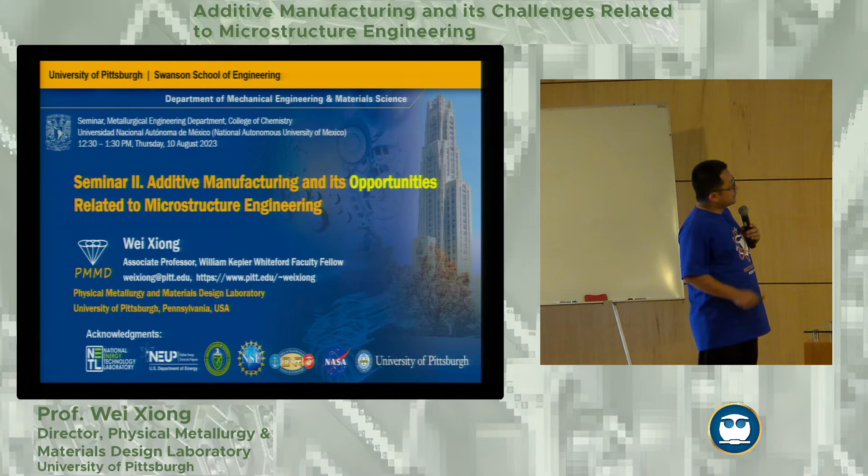So this is a talk about additive manufacturing and the challenges related to microstructure engineering. Of course, it's a little bit disappointing to see all of these challenges, so I think it would be better to revise the title as opportunities. Once we have the challenges, we also raise up with our opportunities.

I come from University of Pittsburgh. Once you're talking about Pittsburgh in the US, you know this is a kind of city of steel. So US Steel and all of the steel factories were producing this, and Carnegie Mellon, and of course they were founders of the steel production in the United States.

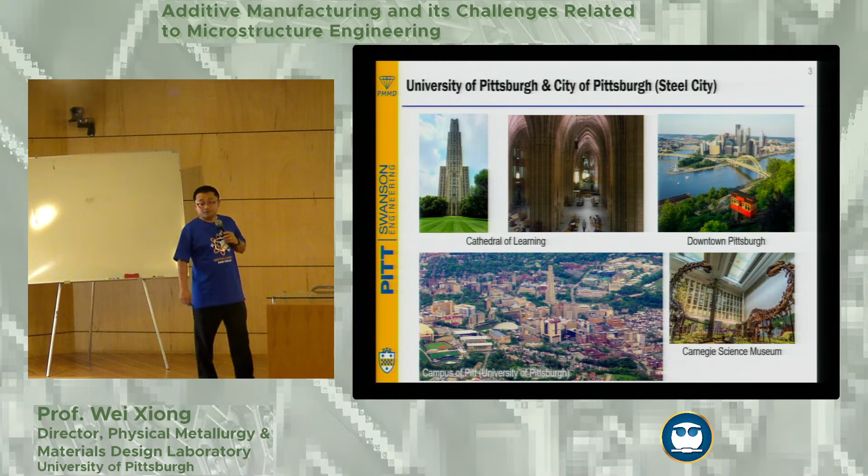If you went to the University of Pittsburgh campus, we have the Cathedral of Learning. This is a landmark building of the University of Pittsburgh as well as the city. Pittsburgh is a very old city, and the university is one of the oldest in the United States.

As I said, I happened to join the university in 2016, and later I just found we have more than 150 years for mechanical and material science. Certainly before that, we were doing metallurgy, and we are very small in material science right now. We only have 9 faculty doing this research, so it's a little bit tiny and focused on alloys and hard materials. We're also expanding a little bit with softer materials.

Talking about the research group, as I said, I joined since 2016, so our focus has 3 parts. The first part is based on simulation modeling, which I already covered yesterday with 2 talks. We do quite a lot with database development and computational materials design. However, we know material science is lacking data.

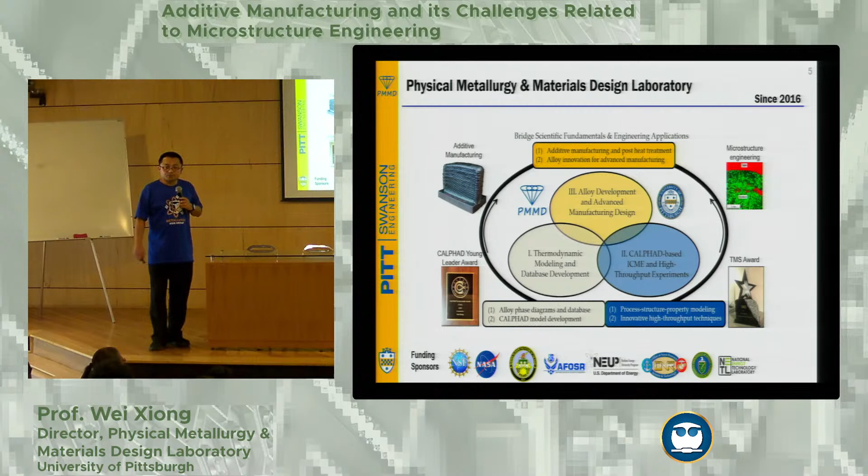Right now, a lot of people are also asking questions about AI and machine learning. So we focus pretty much also on how to extend this ICME method based on some high throughput computation and experiment. Based on that, we do a lot of design, including new materials design and modifying existing materials. We're also interested in advanced manufacturing, which certainly covers one of the topics we're talking about today: additive manufacturing.

If we look at the general design concept of additive manufacturing, we have to talk about the processing, microstructure, property, performance links chain, right? So we're going to list all of these microstructures.

One of the fundamental and basic designs of additive manufacturing is making sure you make a material comparable with the counterpart made by traditional manufacturing technique, or maybe even higher. Once you introduce a microstructure with an as-received condition from additive manufacturing, since this is a different processing, you have to take care of a lot of processing optimization. You cannot use exactly the traditional manufacturing process with heat treatment, for example.

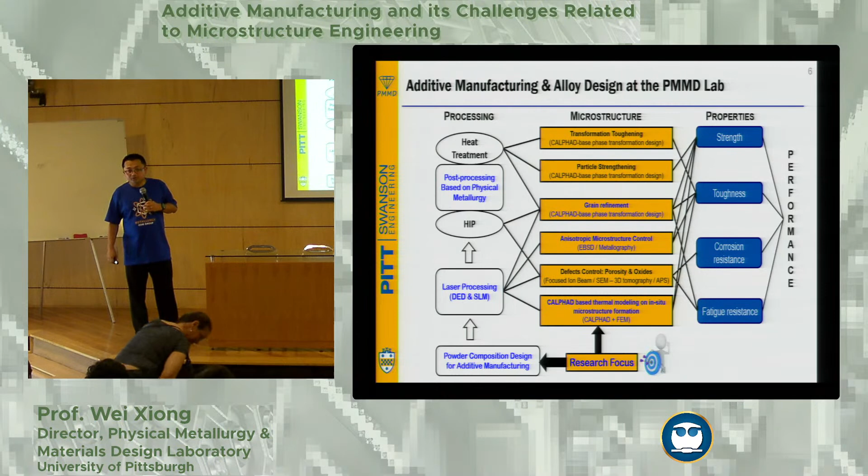Surface finishing and everything has to be changed and accommodated with the as-printed microstructure. So that's a part we focus on very much. And of course, we care about the composition design. If you design one of the alloys, maybe it's not necessarily suitable for additive manufacturing, even though it can be used for casting or some other type of traditional process. So we focus on the composition - that's the most important part from the beginning.

For alloy additive manufacturing, I come from the community doing hard materials, alloys and steels and so on. We have different types of technique. I know that even though your university does not have a 3D printer so far, if you look at the name of your university, UNAM - that's a short name with additive manufacturing in the last two words. So the additive manufacturing techniques - first one is selective laser melting process.

I already mentioned a little bit - this is based on the powder bed, where you have one layer and then you melt the pattern of that layer designed by you with the geometry, and then layer by layer you keep adding on top of that. Therefore you build a 3D structure.

And then you can also have some other type of manufacturing process, like the so-called directed energy deposition process, where you focus on having the powder spray or the wire spray. At the same time, you melt this part at the focal point.

So the advantage of the first one is certainly you will be able to print some fine structures, right? The features of this microstructure are actually much finer than with wire or powder. However, the advantage of these two is you can start to print different alloys at the same time. Typically you can use two wires simultaneously and feed them into one material. You control the feeding rate, and therefore you can start to print so-called functionally gradient alloys or materials.

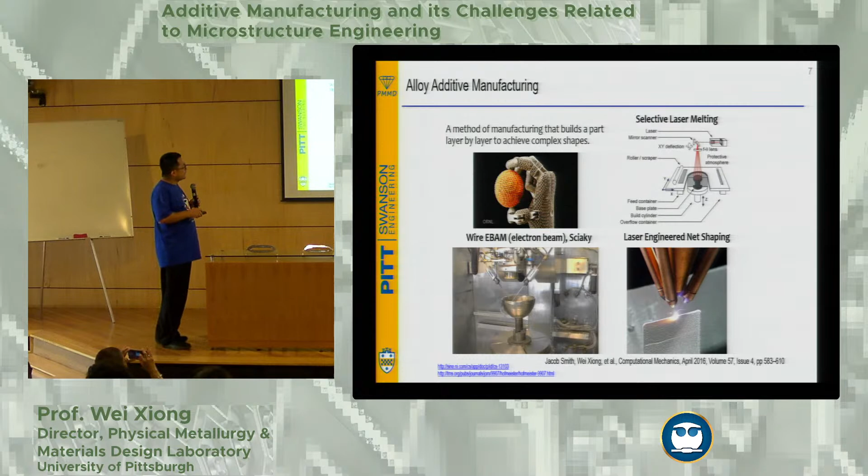So you can print alloy A to alloy B, and this one as well. Another advantage is you can repair something - if you already have an existing blade, for example, and you want to repair some of the parts, that's actually doable.

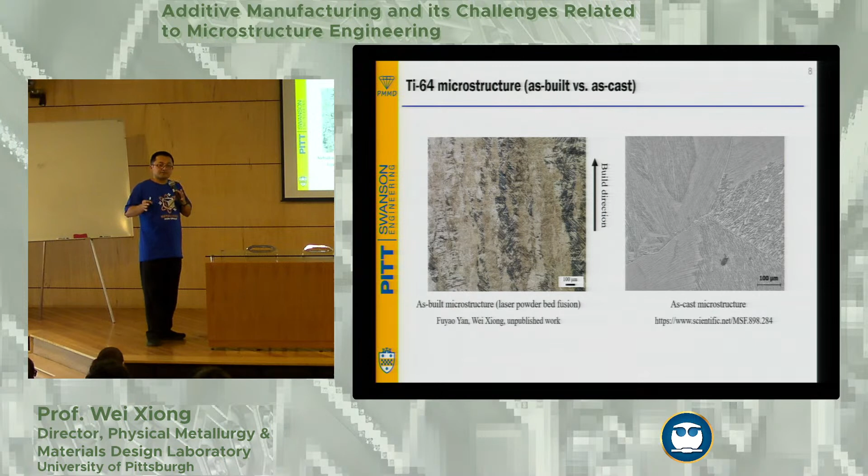Okay, so we're talking about microstructure in this lecture - what is the difference? If you check some of the printed microstructure of Ti-64, that's very commonly used for Ti alloys, the left-hand side is actually the as-printed microstructure from the laser powder bed fusion process, with the building direction shown. You can see all of these columnar structures start to show up, versus the as-cast microstructure from the casting foundry, which does not necessarily have a strong texture like this.

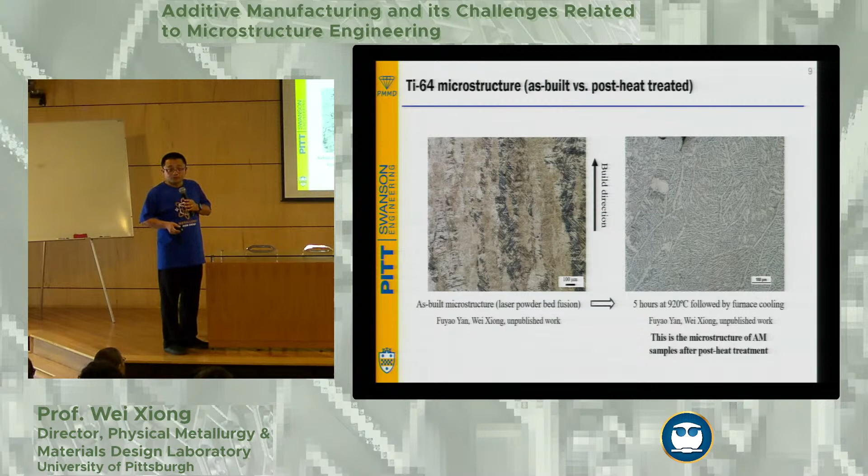And then if you do some further heat treatment, you're going to see that some of the heat treatment can remove some of the textures. So that tells us, first, the as-printed microstructure is different - you have to customize with a suitable heat treatment in order to engineer the microstructure, making sure you get the desirable properties of the material.

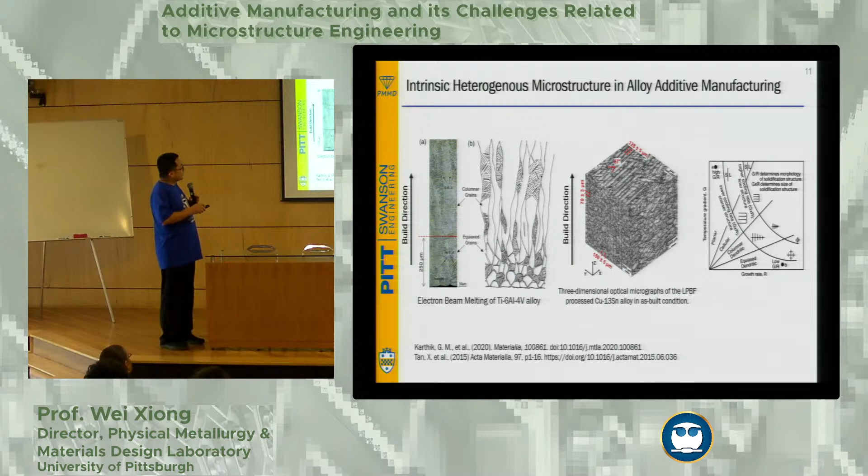However, if you look at another transverse plane, you probably don't see all of these melt pools. This brings us another design area where you can change and modify printing parameters to control the growth of the material from the initial point. You can tailor some structures to be columnar, tailor others to be equiaxed, and then start talking about heterogeneous grain. So that's one of the opportunities we can look at.

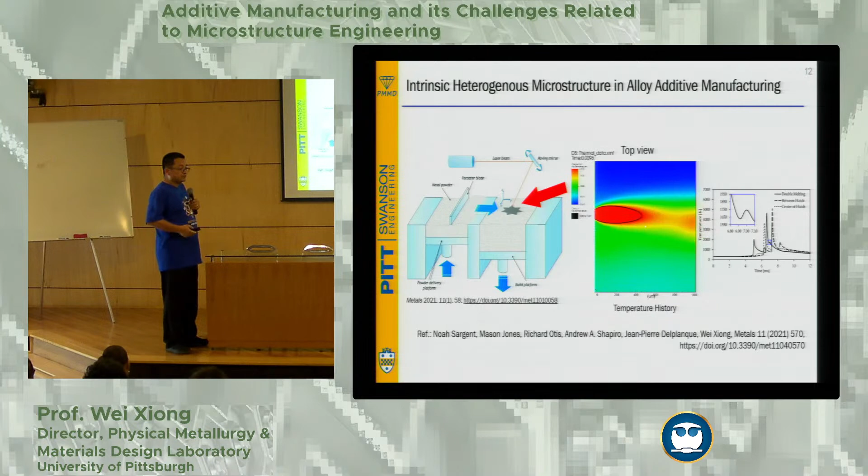This is something we did simulation on to try to understand. For those not familiar with this thermal history, it's very complicated because it's laser melting, depending on the heat source. Some heat sources can introduce heating and cooling rates up to 10 to the 6 K per second, depending on the material and powder used. I don't think anyone so far can precisely measure all of this thermal gradient at the moment. That's also a challenge, because if you cannot measure it, it's very hard to improve and control. So a lot of things are still focused on heuristic design of microstructure.

So what is the consequence if you have such heterogeneous development with texture? If you don't design this well, if you don't introduce good heat treatment to tailor the structure, you can see some structures will introduce very strong anisotropic properties in tensile strength. And of course you can test this further with magnetic properties and so on.

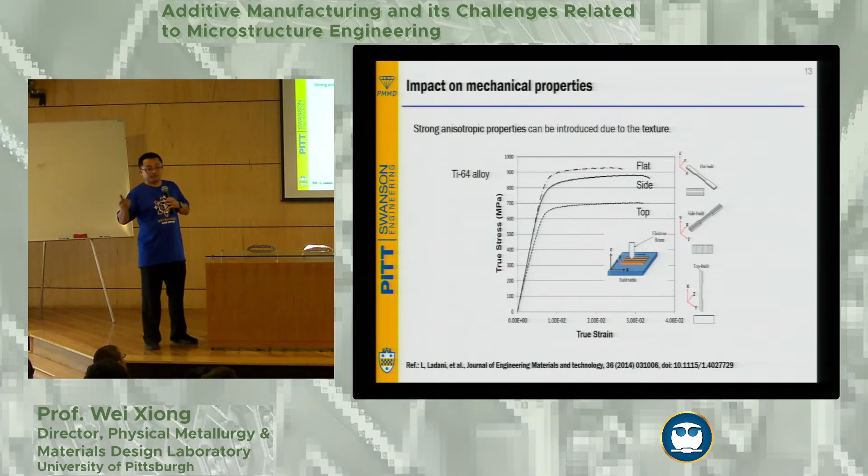So here is a question. You have phase transformations and microstructure evolution - I think these two are almost identical concepts - and they're significantly different from conventional manufacturing processes. So how do you perform microstructure engineering, how do you modify phase behavior and grain structure? That's a kind of challenge.

With this, we want to further understand some basic design points. If you're talking about the three stages of design for additive manufacturing - right now you can buy a 3D printer that's not very expensive if you want to print polymers and plastic. That's just a kind of toy for mock-up. You just design the geometry and print it out. Then if you want a prototype, that's actually a little bit harder.

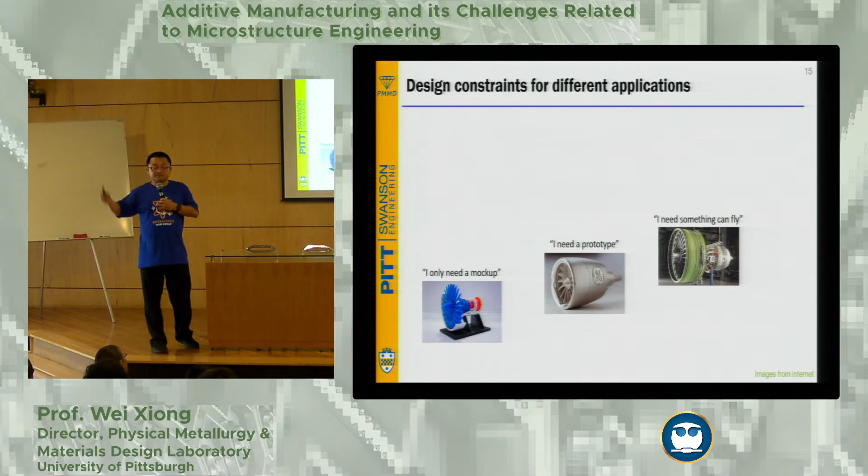This comes from GE, as you can see this landmark, this trademark. However, this doesn't necessarily have to be the same size as what you'd actually use for flight. This is still much more difficult than the mock-up stage because you need to consider integration of different components. And if you really need something to fly, that's way more difficult because you have to consider all the uncertainties, qualifications, and so on. That's the kind of level we are discussing - we try to make sure printed structures are actually useful.

So we look at cost-effective design, and we also need to think about how things relate to the hard material, alloys, and so on. There are also 3 steps here.

First, if cost is not a big issue - you have a lot of money, like Elon Musk - he can directly use, he just wants to see the product and ship things to space. Then you can just choose some fantastic alloys and do the printing. At the moment, of course, he will also claim he wants to reduce cost because it's very important for SpaceX. Then he will say, oh, I want a component with outstanding properties and low cost.

These approaches are actually allowing you to do some post-heat treatment. However, less is more. The best way to design a 3D printed material is to have good outstanding performance from the as-printed alloy, so you don't need to design any post-heat treatment. You just use the as-received material directly. That's the best, because you save a lot of cost and money.

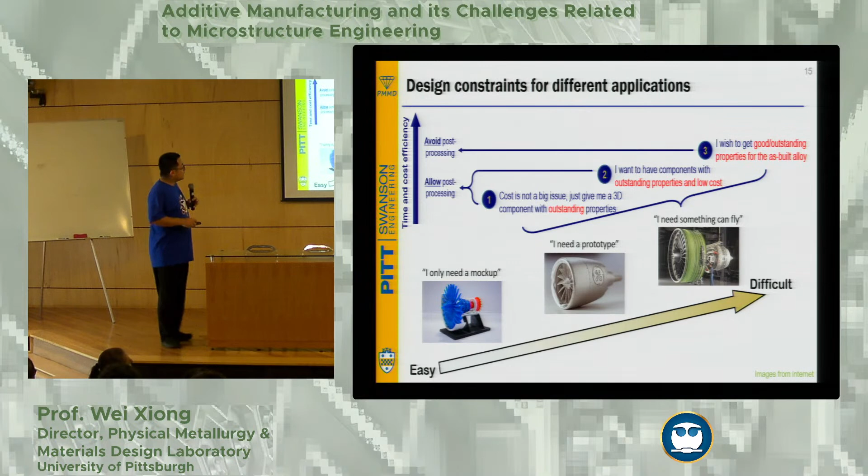So that has to be done with a good understanding of the relationships introduced by the laser printing process, for example. So yesterday I brought up this picture, and some of you already know - I compare this with human development, where the feedstock material is comparable to our human beings.

So as I said, if you want to have a new baby, you don't want to drink, you don't want to smoke, right? That's a high quality. And then you want to send the baby to a good school, making sure they can be educated well.

That's the part with additive manufacturing. You want to really control good laser melting parameters to ensure good melting design for this process. And not everything can be designed well with 3D printing itself, so you have to introduce post-processing. That's the part where, similarly, you want to go to the universities.

So talking about melting design, we have some case studies. I bring some studies from the literature and some from our own work and publications. There are a lot of innovations you can make, but this is still at a fundamental level. We're not talking about using this manufacturing process to make a car or a flight, because that requires a lot of qualifications and so on.

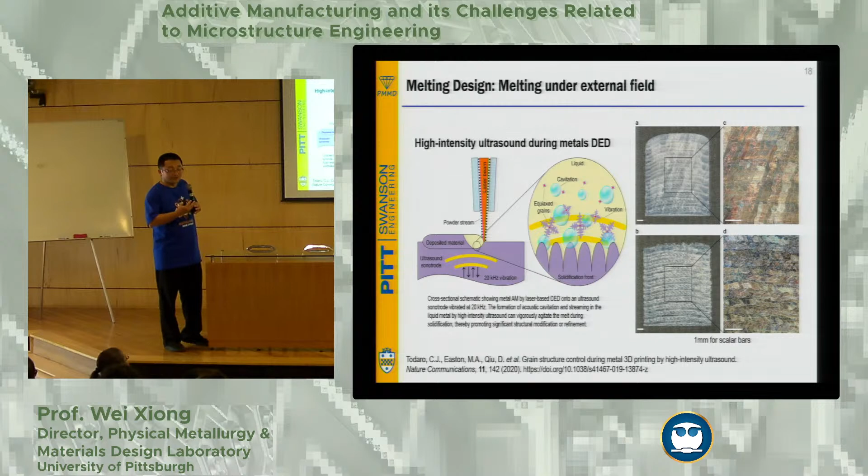That's also applicable. And if you understand the processing quite well, you also have a lot of opportunities to change things directly during the melting process. That's one of the studies regarding the titanium alloy. If you look in detail, this is the sketch, but it's more or less similar to the microstructure you see with regular printing.

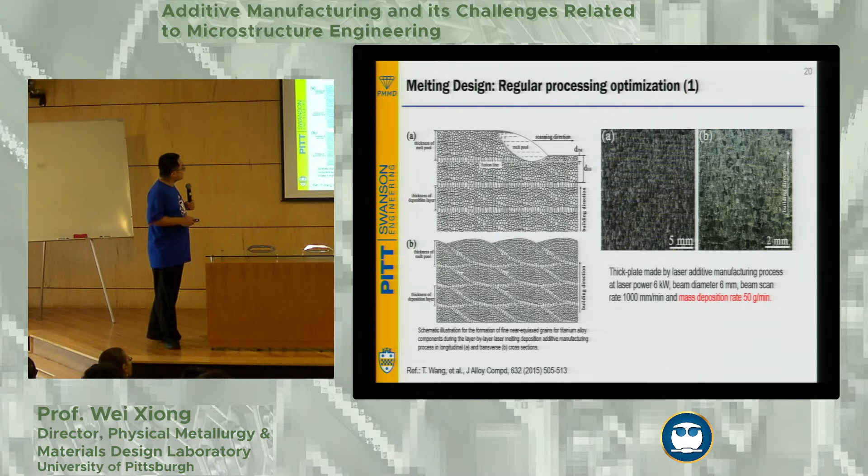You can change the thickness of the deposition layer in order to change the grain structure, and through this introduce a layer-by-layer structure. This is exactly the concept of heterogeneous grain structure in the material. You can control the deposition rate, because if the deposition rate is high, it doesn't allow enough time for growth to happen, so it's limited to nucleation with a very short growth time. Therefore you can refine the structure. That's the basic concept.

Of course it's very hard to quantitatively do theoretical design for this, but with 3D printing you can do a lot of high throughput work. This high throughput approach lets you change the parameters easily within one printing, using multiple processing parameters to see the response of the microstructure. That made it a lot easier to control the relation between parameters and microstructure generation.

This is our work with Haynes 282, a very popular high temperature alloy used in different applications. This technique is nothing different from traditional welding. If you have a wire, you make an arc, and if you weld only one track, that's welding. If you're patient and weld one layer, two layers, three layers, several layers, you start to do 3D printing. Same technique.

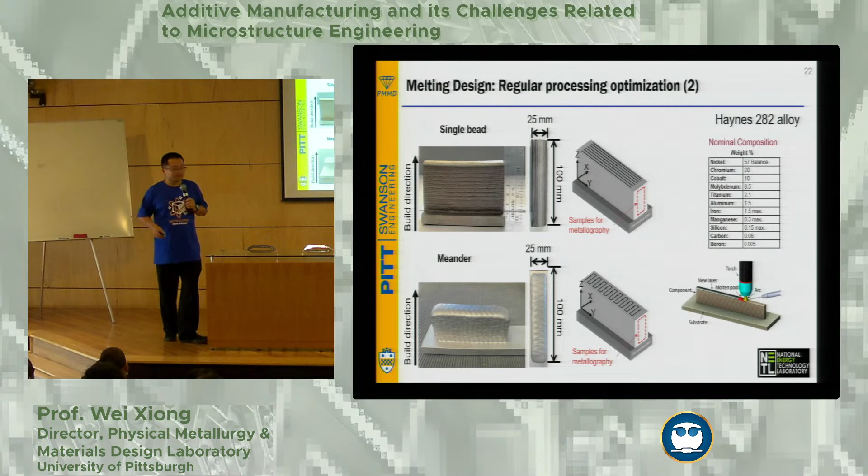So what is the sequence? If you check the cross section, you can see the single bead introduces a lot of fusion lines. They are not necessarily parallel with each other, because the single bead has less heat dissipation. If you melt this direction, you can wait long enough to cool it down, so you see a lot of melt pool shapes here.

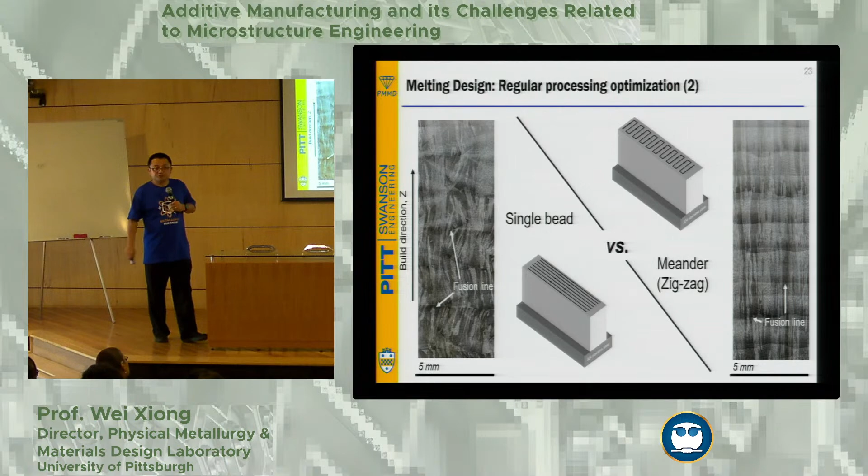But with the zigzag shape, it's actually very high intensity, with such a cross section with the heat. Therefore, you can see some of the fusion lines are actually horizontal. So with this, you can see some as-received microstructure differences.

So let's look at some post-processing with heat treatment. I'm just taking some examples, still connecting with Haynes alloy with some slides. Before that, I'd like to say, if you look at this Haynes 282 that I showed you, these grains are very large. Typically the melt pool size is almost 2 millimeters or even larger, because it's a traditional arc melting process. So you would like to think about how to refine the grains.

With this concept, we started with Inconel 718. This is the one from the previous presentation talking about recrystallization—an old metallurgical concept, but still very useful with new techniques. Inconel 718 is also a high temperature alloy, so we compared the cast and LPBF, the laser powder bed fusion process.

As you can see, this is the as-received microstructure with the cast—it's almost a perfect equiaxed structure. With the LPBF method, you can see a columnar structure very much. However, if you design well the homogenization, an essential part of the post-heat treatment, we put 1180 degrees C for 20 minutes, 1 hour, and 12 hours, and you can see the microstructure change.

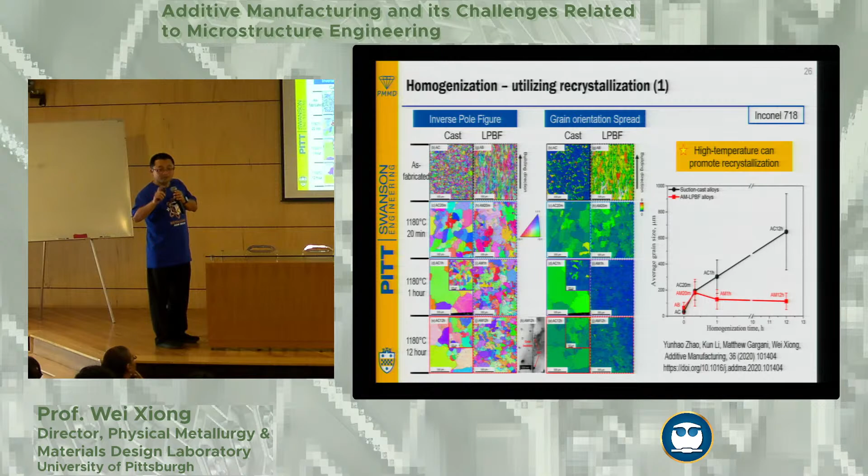If you dissipate the stress at high temperature, this stress helps refine the grains during the recrystallization process. If you analyze the grains, the additive manufacturing grains actually become even smaller than the original ones. That's a good indication—it means additive manufacturing doesn't always bring trouble if you can really define the post-heat treatment well. That's encouraging.

All right, so this is not the whole story. We have a 'but.' If you look at the 'but,' that's something bad. Why do we say 'but'? Because, as I said, every step is linked with each other.

Inconel 718 is a precipitation strengthening material, with gamma prime and gamma double prime. So if people design this, you also need to do a very well-designed precipitation strengthening process. If we blind ourselves and say, hey, I get a better grain, so the material would be better—that's actually not true.

If you do the first homogenization process, you receive fine grains. However, the consequent lower temperature aging process will introduce different precipitation behavior. That's because the homogeneity of niobium, the most important element in this alloy contributing to the formation of gamma prime and gamma double prime, is actually different now.

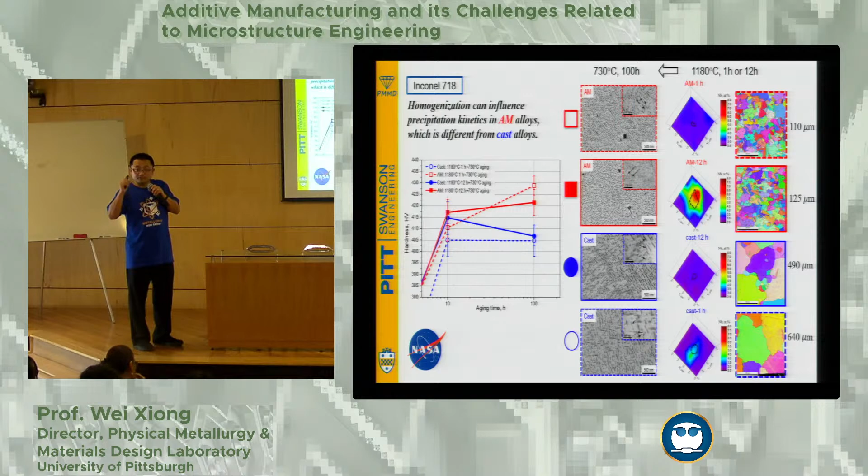So you can no longer use the traditional cast alloy heat treatment. You have to further change the heat treatment schedule in order to ensure you keep the same strength, or even higher strength, than the traditional material. That's the piece of information we have to keep in mind.

So with this study, we learn a little bit about the grain structure, which is very important. And then we further want to look at some even more challenging problems with Haynes 282. As I said, this is a laser powder bed fusion process, and the structure is actually much finer.

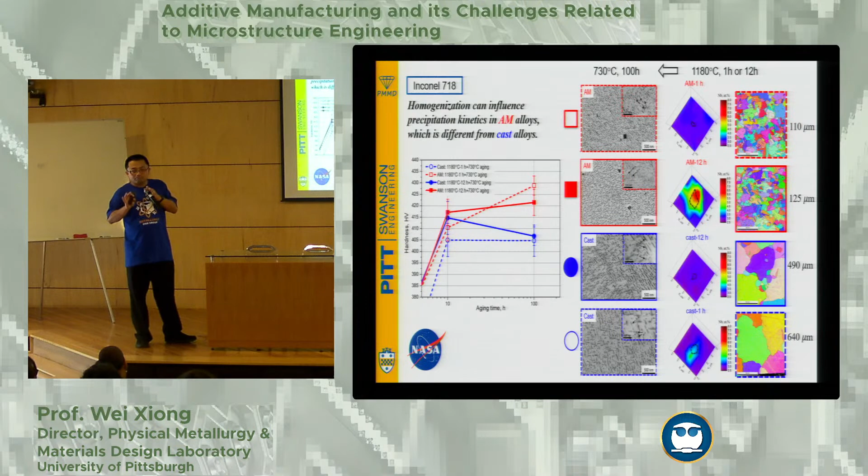If you do the wire feed process with Haynes 282, that's the wire feeding with welding, these columnar structures and so on are actually more than 1 millimeter. You don't want this at all.

So what we did is check in with different temperatures. We also want to promote some recrystallization process. What we did is different temperatures, different times.

And behind this, we were checking some segregations and using Thermo-Calc and CALPHAD to predict the reasonable times for the homogenization and guide us in doing experiments. That's the reason behind this choice of temperature. I won't discuss this further here.

So after doing heat treatment, as you can see, some fine structures actually happen, but not so pronounced. That's still something we think is good. So what we do is check in with the SEM, and as you can see, this confirms it.

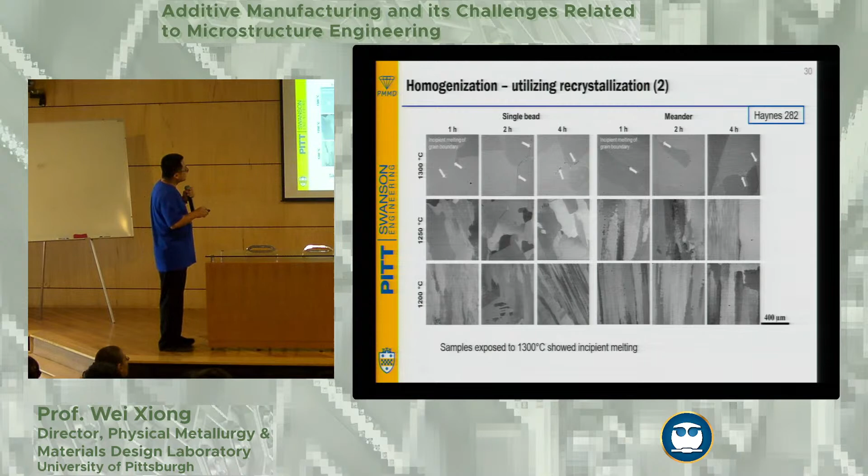Another indication is when you look at these two different printing strategies: single bead and meander. Because the initially introduced microstructure is also different, even if you can promote the recrystallization process, you're not necessarily guaranteed that this recrystallization will help all the grain refinement introduced in this Haynes 282.

So it only happened with single bead, more pronounced. But that's not the full story - we have another issue here.

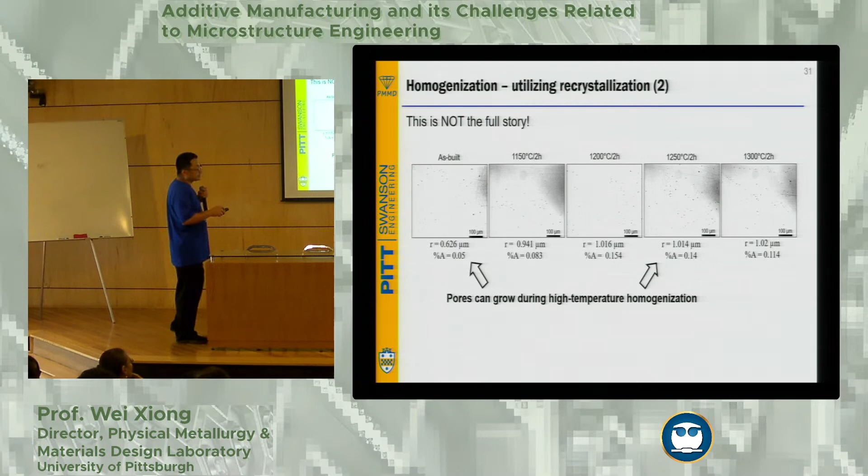So we actually find that if you do higher temperature with recrystallization, then all of these pores become a problem. If you have the additive manufacturing introduced microstructure here, you can see different pores. But then if you further do the homogenization, these pores will start to grow.

That means what? You have to use another technique to solve the problem. So you get a refined structure, but you introduce more pores, because the pores are actually growing. So what we need to do is actually introduce a hipping process. If you don't have hot isostatic pressing, then the pores will become another issue preventing the retention of high strength for this alloy.

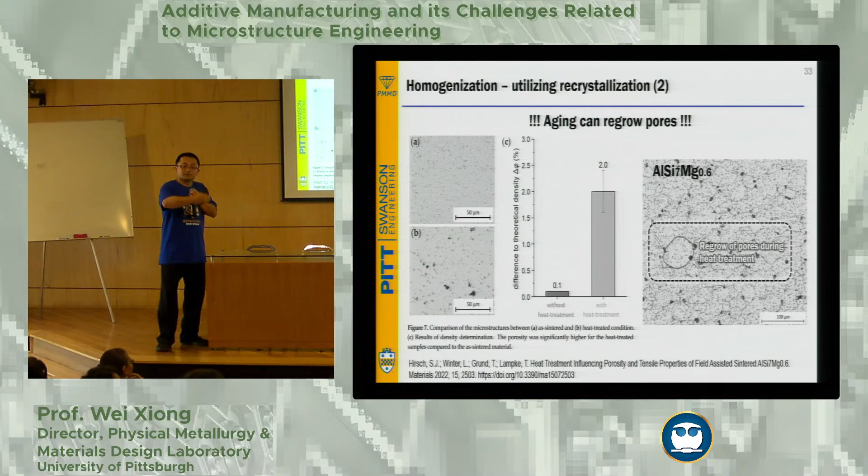So aging in particular can regrow the pores. This is another example you can find with aluminum alloys. So there's a lot of trade-off in how you design additive manufacturing with heat treatment and processing, and of course you have a lot of degrees of freedom to introduce a good design for the material as well.

So I don't want to say all the things are bad and challenging about additive manufacturing, but I would like to still encourage everyone to use traditional or classical metallurgical knowledge to design additive manufacturing. This is one of the studies we checked before with one of the steels. If you look at some of the martensitic cyclic transformation studies in traditional publications, people considered grain refinement with cyclic austenitization process. This process is very simple.

If you do a kind of casting and so on, you receive the microstructure. What you can do is heat it up and let the microstructure homogenize, forming the austenite, and then you quench it and start forming martensite below the MS temperature. Therefore, you can do a cyclic cooling and heating process. Once you form the new martensite, you have more nucleation sites, more dislocation density, and therefore much finer grain size. That's a well-known technique with a cyclic austenization process.

So what we did with this new maraging steel that we designed, trying to commercialize it, is the composition, which is still quite different from traditional maraging steel, 17-4 PH. So this is information where you'll be able to see some of the martensitic cyclic structure.

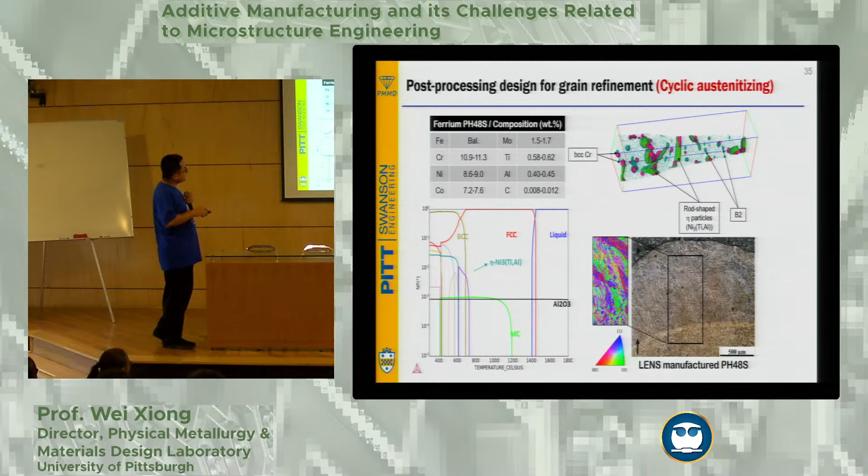And then we did additive manufacturing printing process. The post-heat treatment we do is homogenization: water quench it, heat it up, quench it, heat it up. What's the consequence? This is the average prior austenite grain size. With one cycle you get a reduction, two cycles reduction, three cycles, because you have a limitation with the new nucleation sites introduced by martensitic cyclic transformation, you reach a plateau. And the hardness is also reaching almost the same at these cycles. That means within 3 cycles you can actually refine the grains.

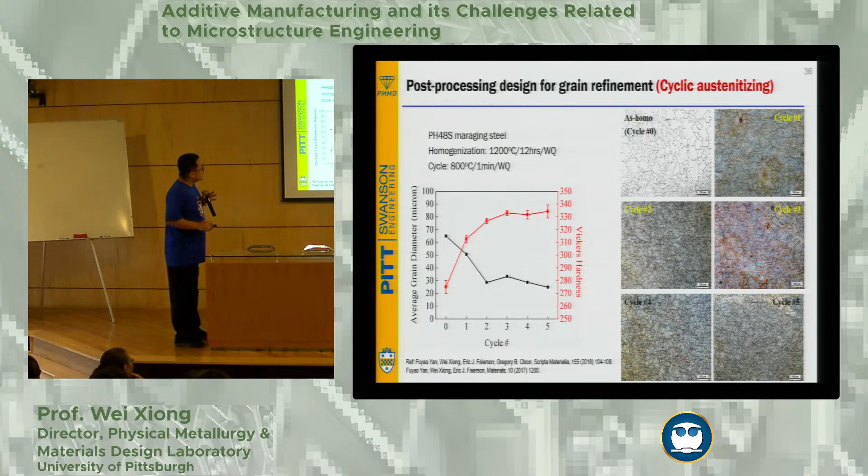It's a very, very encouraging story, talking about traditional metallurgical concepts that still apply.

And of course, another thing we're talking about with grain size refinement is using Zener pinning grain boundary particles for grain refinement. And Zener also stayed in Pittsburgh while developing his metallurgical theory.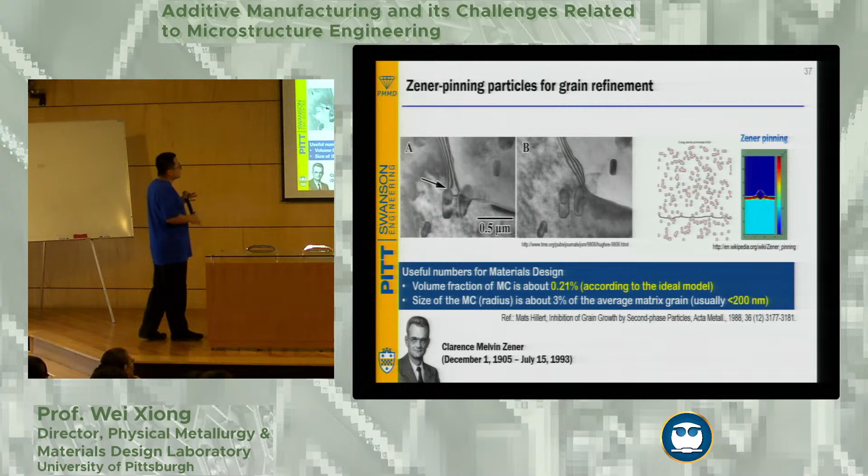So for the Zener-pinning particle, this is from Wikipedia. I don't think it's a real picture, but it gives you the concept: if some particles, for example in the steel, you have MC carbide particles, if small enough, close to less than 200 nanometers, you can have a kind of pinning once the boundary crosses this Zener-pinning particle. This can actually delay grain growth and make sure you get a fine grain. This is the same or similar concept as in casting, where you introduce inoculation with particles.

So this is kind of a discovery type of work. We started with 3D printing of 316L. This is again a laser powder bed fusion process. We asked people to hand down some powders, so we characterized the composition, and this is the composition of the material. As you can see, you have this oxygen content.

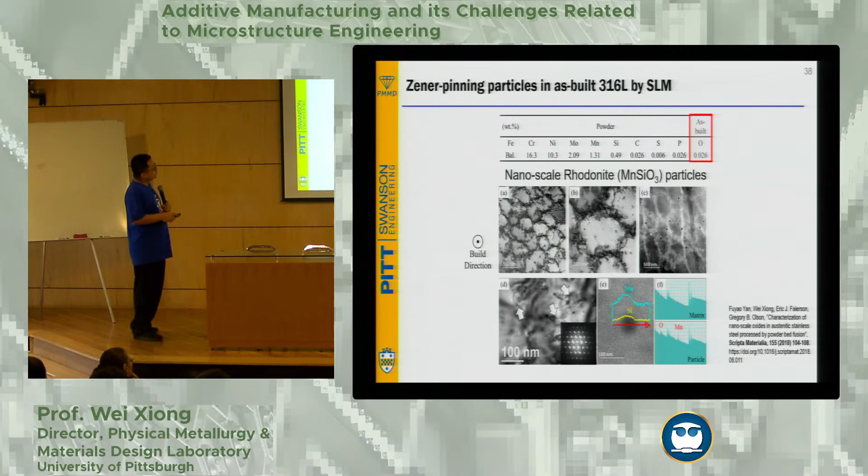So we started with this homogenization again. We finished printing, then did high temperature processing with homogenization at 1200 degrees C, austenizing it. Then this continued with different examples: we did the printed one, with half an hour, 1 hour, and 2 hours.

Visualizing the IPF picture, you can already see some of the grain effects, it's actually a little bit finer. And quantifying it, the grain size is also reduced. Here, this is the hardness - I have the wrong index of the color, sorry about that.

So what is the reason behind this? We checked the microstructure with EBSD, and also checked with TEM. Once we went to the TEM study, we checked all of these possible precipitations. This is the printed one initially, and we find a lot of small dots, also spherical shaped, entangled with the dislocations and cellular boundaries.

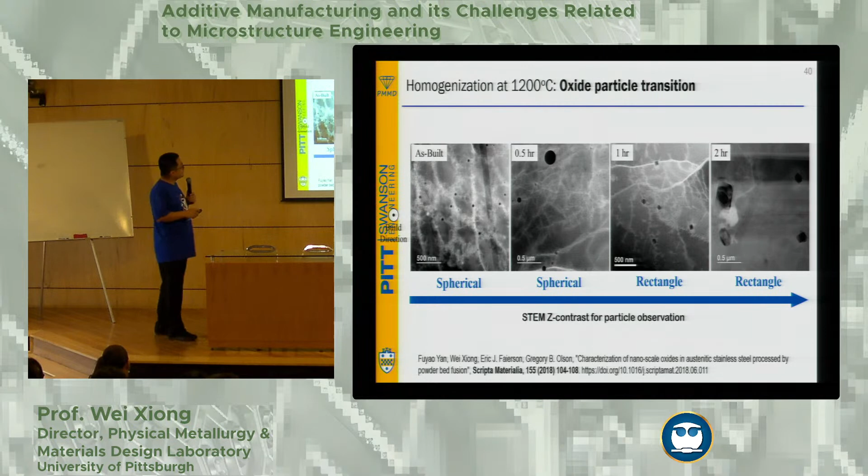After 30 minutes we find some growth, and at 1 hour and 2 hours. If you look at the shape, it's also changing, starting from between half an hour and 1 hour, it becomes spherical to rectangular shape.

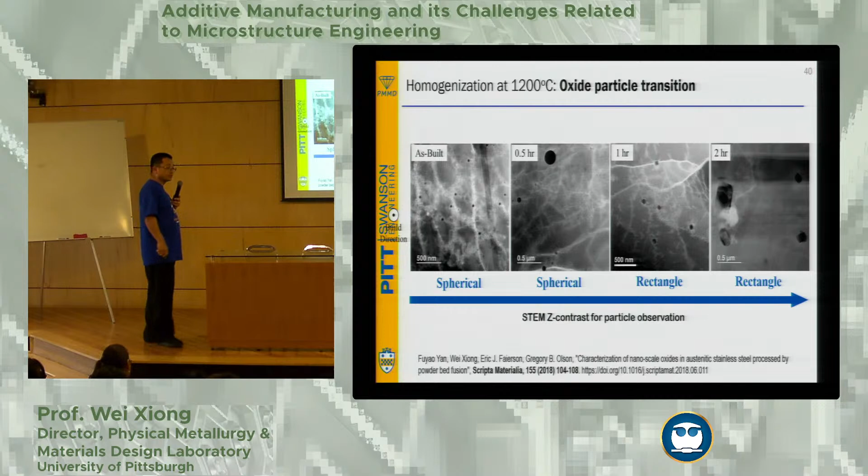What's the reason? We use Calphad, we use Thermo-Calc to calculate and understand better. This is exactly what I was talking about yesterday, the iron-chromium system, suspended sigma phase calculation, or including sigma phase calculation. We quantified, did some EDS in the STEM, and identified these particles are actually spinel, with manganese silicon. And then we calculate.

If you do the calculation, you see, I put the composition, using the iron database, including the oxygen content, I can see the spinel phase is actually showing up. This is exactly the ideal size and fraction of the Zener-pinning particle.

In addition, the Zener particle fraction has to be low. If you have too much of the Zener-pinning particle, that will become an inclusion later. So you really want to get this very low fraction of the spinel. But then we still did not explain the reason for the spherical shape.

So what should we do? We checked another one, rhodonite. It's the same type of chemistry, but the shape is just different. We further checked with some information and found rhodonite is actually a metastable precipitation oxide, so we were trying to understand.

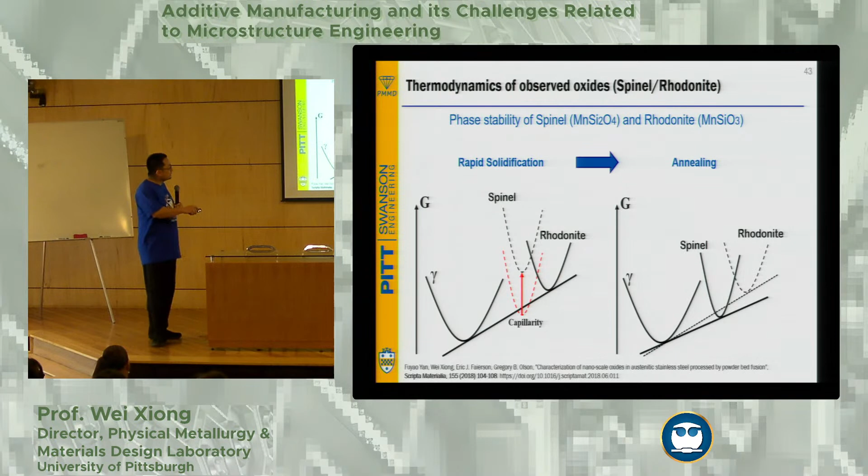So how to confirm it from the Calphad calculations? You can easily do one calculation in less than 5 minutes. So what do you do? Suspend spinel, because the Calphad database already has the rhodonite system in the system. Therefore the rhodonite shows up in exactly the same amount as spinel, which just confirms it. So that's a perfect explanation of how you look at the structural refinement connecting with these oxide particles and the Zener-pinning effects.

So with this, I would like to remind everyone, as I said, the step-by-step design is very critical for additive manufacturing. We studied quite a lot of different types of alloys and wanted to make it useful. For example, yesterday I also talked about high throughput uncertainty quantification using machine learning to customize the high strength low alloy steel composition, along with successful tensile tests and Charpy tests for toughness.

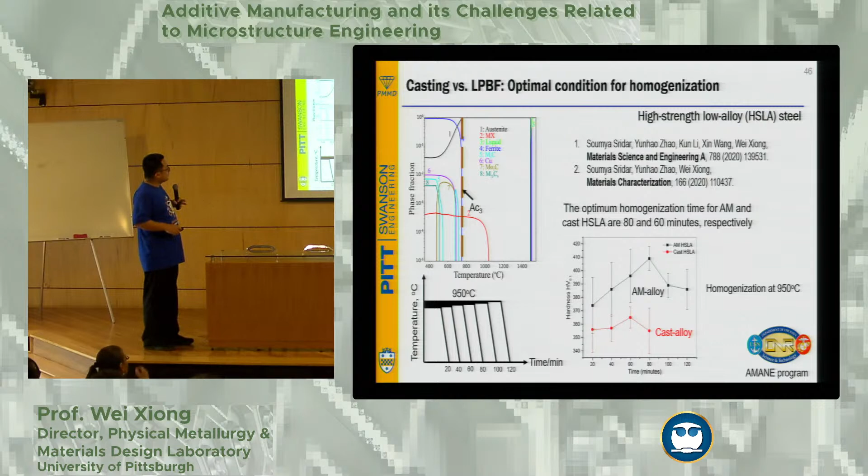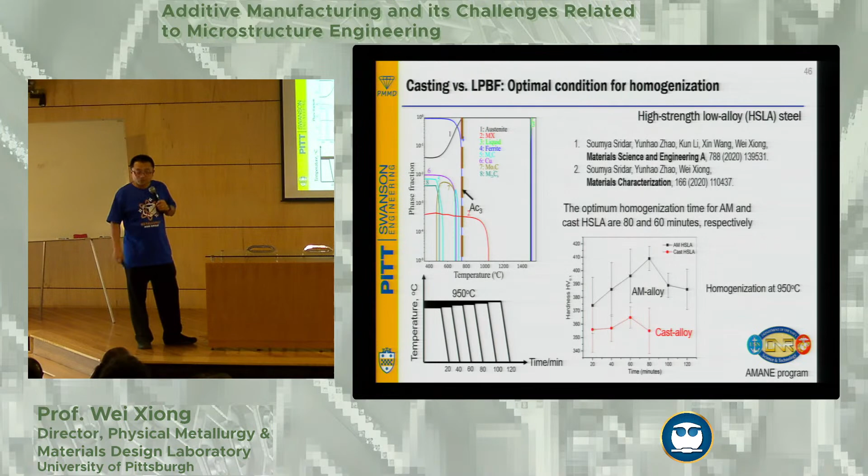Behind this, we also did a lot of work with post-heat treatment design, because if you simply look at the homogenization for the AM alloy, they actually show different behavior during homogenization. The amount of bainite and martensite in the as-cast status is quite different from additive manufacturing, so you will no longer be able to use the traditional processing parameters to process the additive manufacturing component. That's very important.

So if you look at this, this is a casting example of the HSLA, and this is the LPBF sample. As you can see, these grain structures, after reconstructing with the prior austenite, are actually quite different from the cast example.

Again, because this is a high energy density additive manufacturing process, laser powder bed fusion, we actually get good luck. We have some good structure with prior austenite, and you can actually get a better matrix structure. However, consequently, if you do the design of tempering to introduce other particle strengthening with copper and so on, and also M2C carbide, then you have to change the parameters as well.

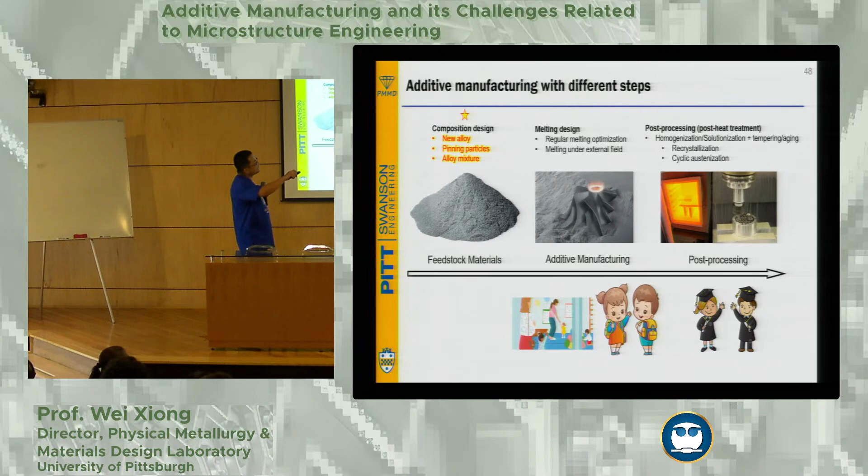So I talked about this, discussed a little bit about this, just to show you some of the concepts of how to introduce design in additive manufacturing. This part is actually the ultimate chance where you can introduce some new material for additive manufacturing. So here is some other published work from papers.

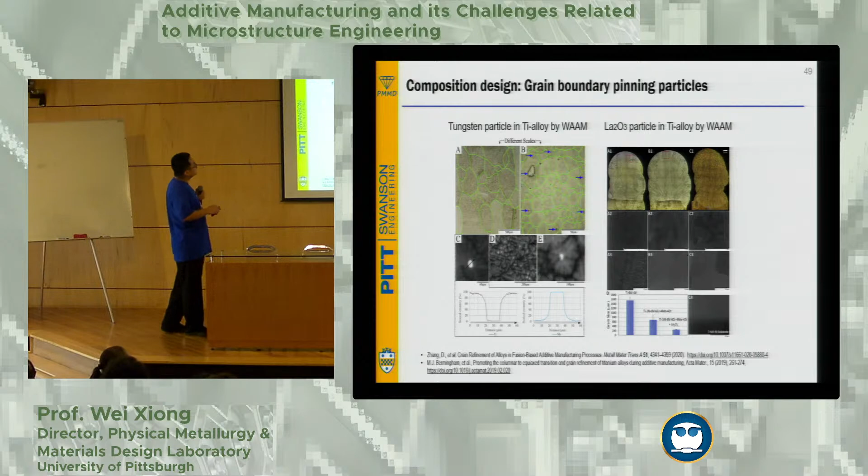This is a kind of titanium alloy printed by wire-arc additive manufacturing, same as we printed with the Haynes 282. It's a wire welding process, and the grain size is very big. They were using the same concept as inoculant particles, putting some tungsten particle into the material, because tungsten is very hard to melt. So therefore it acts as an inoculant particle and refines the grains. Particularly if you do the heat treatment, because the tungsten particle is also resistant to coarsening, they can maintain the small size of the particles.

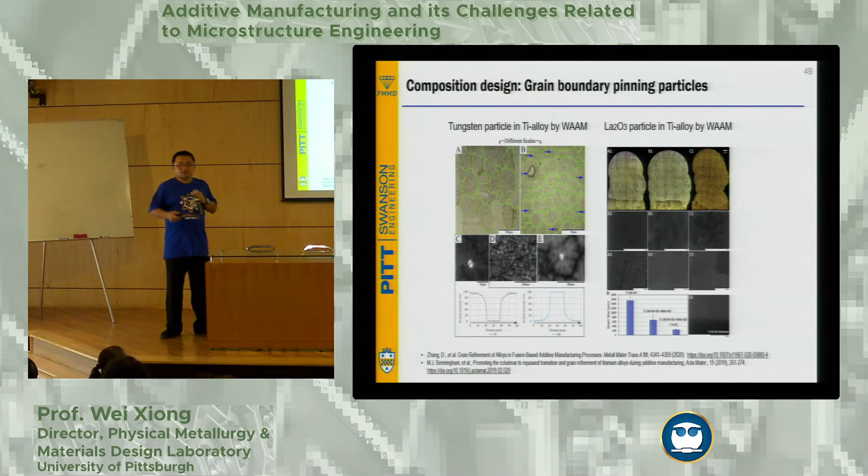So this is another attempt where they introduce some oxide particles to the titanium. Both are successful. I think quite a lot of people are actually doing this kind of work to refine the grain structures nowadays. And certainly this is a kind of modification, right? So you don't need to change a lot of things with the alloys, but you can really do some good design with a new composition.

So this is one of the works published in another paper in Nature Communication. They were talking about introducing a new alloy. Santa Barbara was working quite a lot with cobalt nickel alloys. They were thinking cobalt can increase the solvus temperature for the super alloy, so they changed the composition of the nickel alloy and introduced more cobalt into it. If you look at this, this is actually a much finer structure, and as well as the precipitation, they can reach the strengthening effects with the L12 structure.

Okay, but then we have to think about one problem. This is the same figure and same picture that I showed you yesterday. What's the challenge? If you can get enough funding, you can test with a lot of alloy powders and so on. But even once we were studying this HSLA steel, it's not easy. We get the funding, we have the money, but we cannot get the powder. The cost is actually tripled or even 10 times compared with the traditional stainless steel.

And remember, this high strength low alloy steel is actually commonly used in the Navy. It's not a strange alloy. But the lead time - you send the money order to them and they say, oh wait, now you have to wait for 3 months. Ultimately we wait for 10 months. That's a long time you have to wait. And then they ask you for a minimum order quantity because you are the only customer ordering this powder, so they will charge you more.

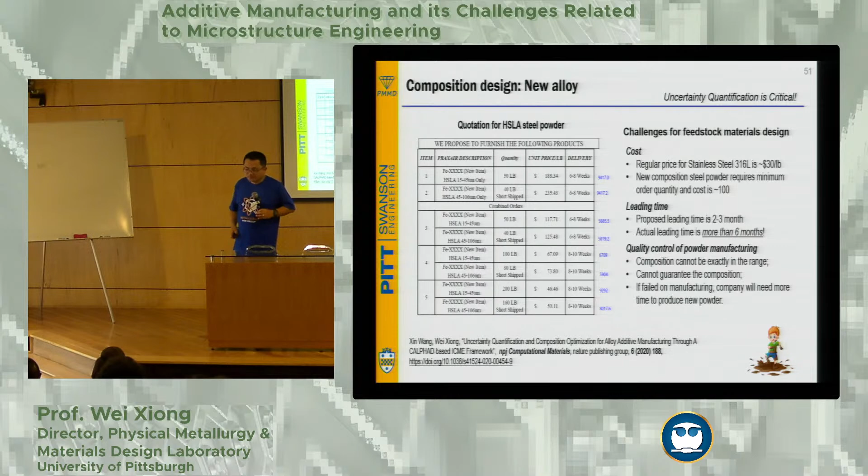So we have to bypass this challenge. Of course, still, if you get a lot of funding, you can test. So one of our strategies is to try to design some potential alloy with a prototype, which we can do some casting, arc melting, and check some microstructure features. For example, if you want to design an alloy for additive manufacturing with particle strengthening, you can do the test with traditional arc melt to get a sense of whether the phase stability is okay or not.

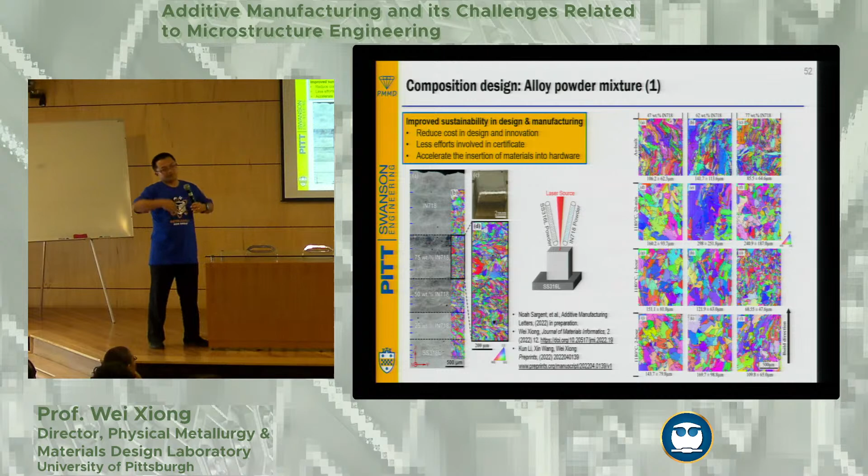But then we came through another direction. Our group actually made a lot of efforts about 5 years ago, because we got hurt by all of these issues. So what we do is recognize that additive manufacturing is not only an engineering technique, but it can also contribute to scientific fundamental study. One of the things we tested is using the directed energy deposition technique. This allows you to print alloy A 100%, go to alloy B 100%. If you have multiple spray nozzles of powder, you can study even more materials together. So we have 2 nozzles, a twin nozzle, and we print 316L on the bottom and Inconel 718 on the top, with a very simple test of 25% increase.

Very interesting - if you look at 75%, this is actually a fine structure. Very surprising to us. We were so encouraged by looking at this. And furthermore, as I said, everything comes with a story from your previous experience. So we were thinking, how about we do heat treatment further? We want to make sure after heat treatment, this material is still good.

So we did the same thing, right? We mixed 47%, 62%, 77%, just to benchmark some of the studies. We still use the same thing for the 718, 1180 degrees C, exactly the same time period: 20 minutes, 1 hour, and 2 hours. As you can see the microstructure, which one is finer?

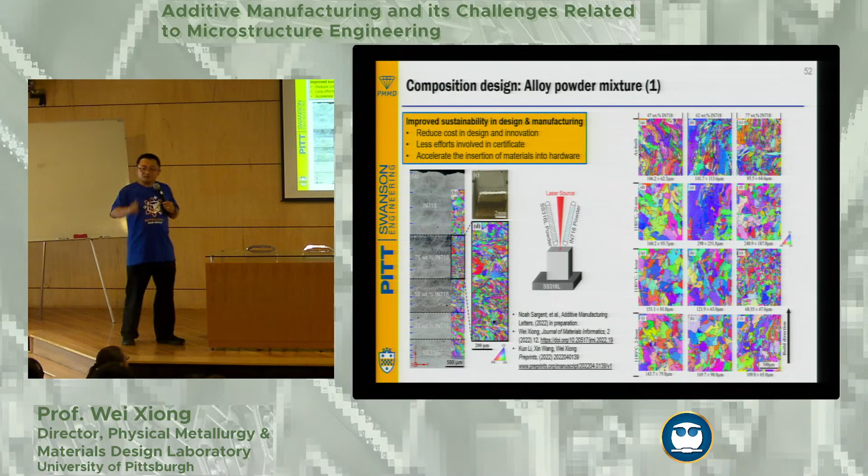If you don't have any issues with color, you would agree with me, this is a very fine structure. At 1180 degrees C, 1 hour, you still can see very fine structure. That's very encouraging, and this is a new material composition now.

So this is not the best of our study, we already published this one, in additive manufacturing letters, so it's already published this year.

But then, with this concept, we further utilize this material to process with laser powder bed fusion process. This is another one, focusing on 75%, 77%. This is actually interesting - we just finished one of the studies by one of our talented undergraduate students. And it turns out with this technique, laser powder bed fusion process, focusing on 77%, we still can get a much better performance, even compared with some of the original Inconel 718.

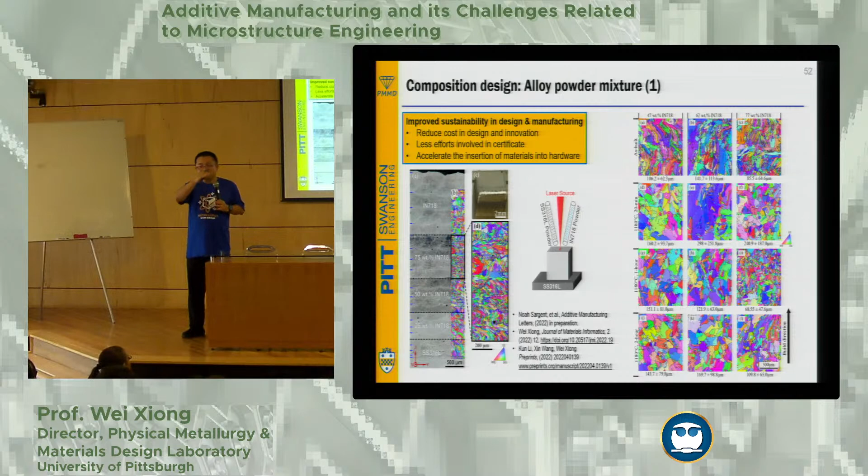That's actually exactly the same concept as Dr. Zhu was talking about, right? Because you want the parent alloy to generate a new alloy, the daughter alloy actually performs much higher than the average performance. That's a very nice concept.

So this is one where we actually received this HSLA powder. Very expensive. Every day I was thinking, okay, gosh, we finished the project, how do we further save taxpayers' money, because I also pay the tax, and further utilize this powder. So how about we try to do some similar stuff as we did here?

So we actually have 316L powder with HSLA. And of course, that's not just kind of blindly pressing a button to do the printing, because the fundamental concept is HSLA is very easy to form martensite, very easy. And the 316L is very hard to form martensite.

So if you think about the stacking fault energy level, because this part is easy for martensite, this part is difficult for martensite, and if we mix them together, in the middle you will possibly have a regime where you introduce TRIP and TWIP effects. That's fascinating, right? No one studied this before.

So I talked with the students and said, hey, how about we print one and check? And another advantage of this technique is, it's a beautiful technique to introduce high throughput experiments, because with one printing, I can print so many compositions to evaluate the performance of different alloys. That's a kind of mixture.

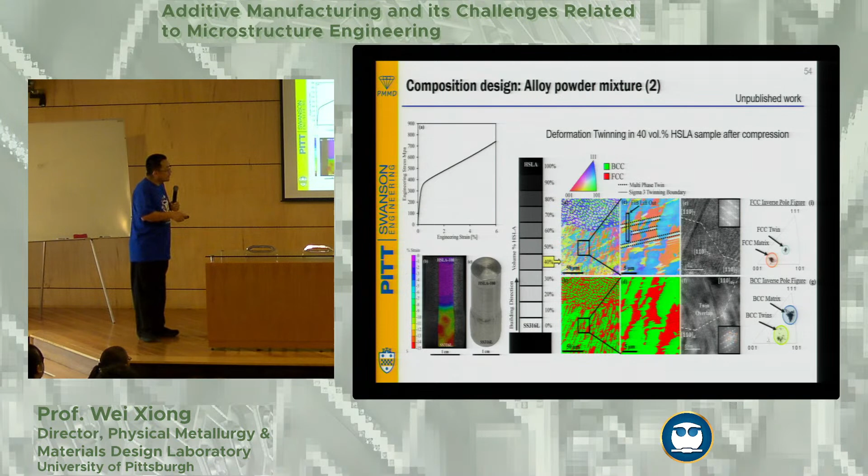And why it happens is because during the melting process of the laser melting, you can introduce some segregations. With the segregations, some parts are easier to form martensite, so they form martensite. Some parts did not have enough formation of martensite, so they stay as austenite. And the retained austenite has a bit of well-controlled austenite stability. So after you press it, you start to form twinning and TRIP effects, forming new fresh martensite.

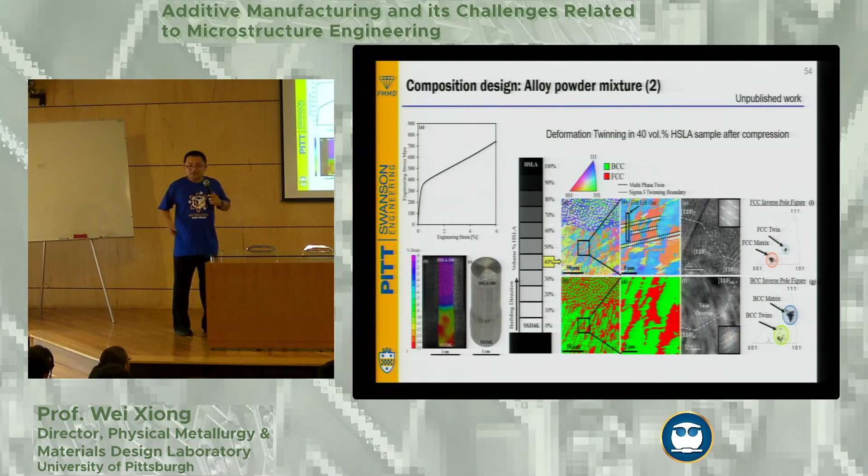This is fundamental, nothing new, right? But then we further print. Because we have our good collaborator at JPL, they print quite a lot. So we say first print one gradient, then check individually, printing 40%.

So what we are doing is a single composition. This is a totally new alloy composition, 40%. And we do a kind of tensile test. As you can see, the elongation is actually quite good, and the UTS and yield strength are also good.

If you put this into the attribute plot, this is a fraction of the elongation, this is UTS, and you can see this is the parent alloy, 316. This is the HSLA with LPBF. With the banana shape, we're actually pushing forward in this direction. And you have to agree, this is also another type of heterogeneous structure.

That's the reason why I give a presentation after Dr. Zhu, so I don't need to introduce how important this kind of structure is.

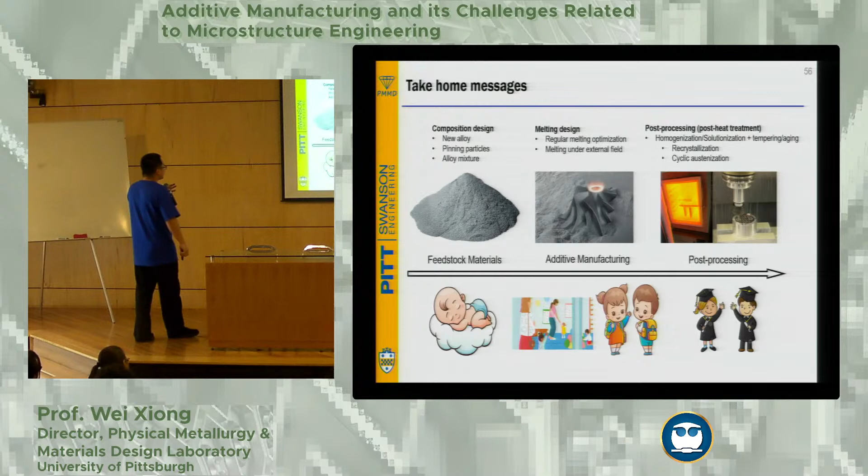To identify correct microstructure features into the design of the composition. All right, so another take-home message.

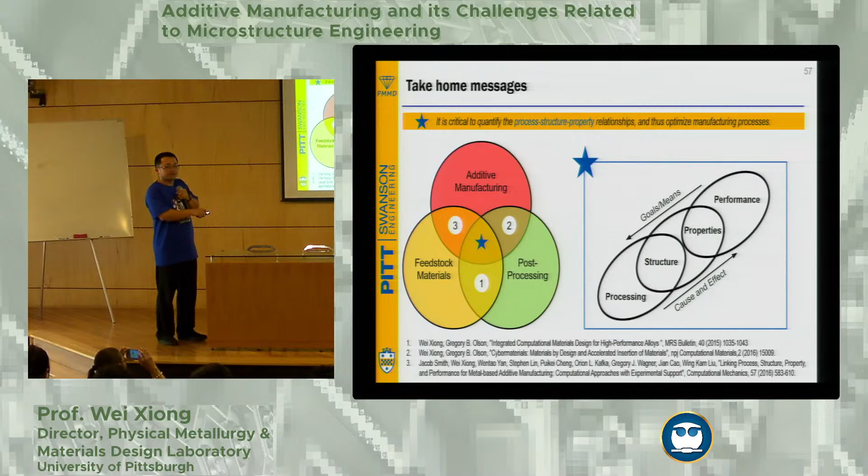But then this part is usually something missing between the collaborations of material scientists and mechanical engineering. We have a lot of barriers talking about language and so on.

Another thing is, think about the concept of less is more. You really want to make sure that if you design a superalloy, and you can print it with a super melting process, simultaneously you can also have the precipitation of the strengthening particle happen during the printing process. That's fantastic—then you can minimize the post-heat treatment.

That's one of the things we've also been encouraged by, studying this Haynes 282. Once we finish our printing, after checking with the TEM, we do see some precipitation happening with gamma prime. That means there are some efforts we can make for this kind of printing optimization process.

And then this indeed, one of the published Nature works by Max Planck Institute, also utilized this concept to introduce in situ precipitation of the particle, nickel titanium, into one of the steels.

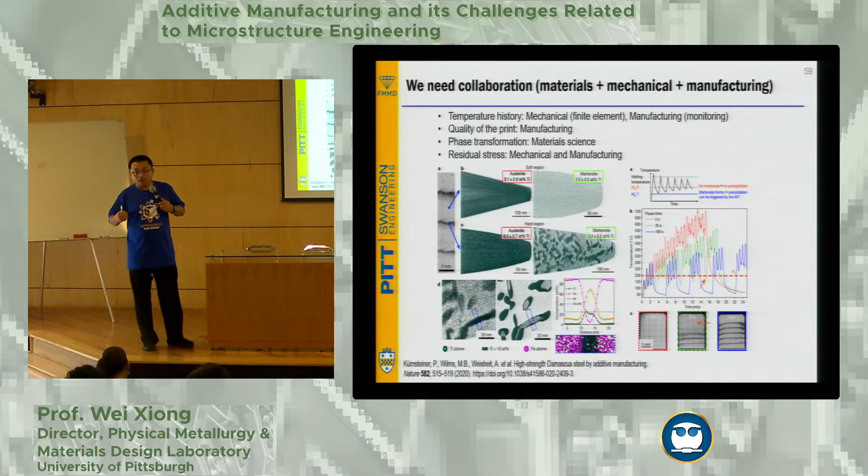They can get very nice strengthening hardening effects of this precipitation right after the printing process, so you don't really need extra post-heat treatment. That's one thing I believe we need to collaborate on between material scientists, mechanical, and manufacturing.

But then, suddenly one day I received bad news from one of my PhD students. He said we bought a new furnace made in the US, and it's broken - we only used it 3 times. I said, okay, so bad luck. Should we dump it? No, we should save taxpayers' money. So how should we do that?

This is the kind of tube furnace. We just keep this plug, close this part, and then we can actually do a printing with 3D printing - print a long bar shape sample with this laser powder bed fusion process. I put this long bar shape sample here, heat it up, and suddenly I can introduce a gradient temperature zone.

So I first do homogenization with this material - this is actually tested with 718 alloy. Then I can introduce a continuous temperature zone to study the aging process. With one sample, you can suddenly study the precipitation strengthening at different temperatures simultaneously. That's perfect - we validate this concept.

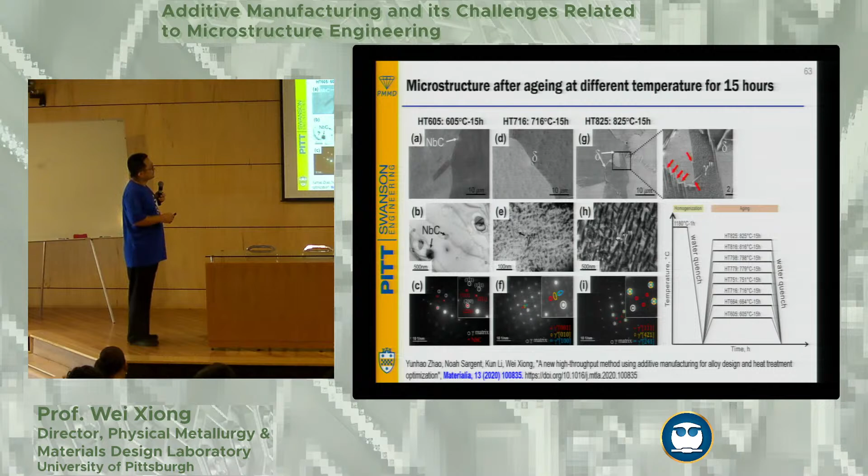We find actually with this 718 alloy, after 15 hours, 716 degrees C gives the highest hardness. Nowadays we are using this technique to further study a lot of strengthening effects of different materials, including the Haynes 282. That's a very nice concept we can use for additive manufacturing process - it's high throughput processing.

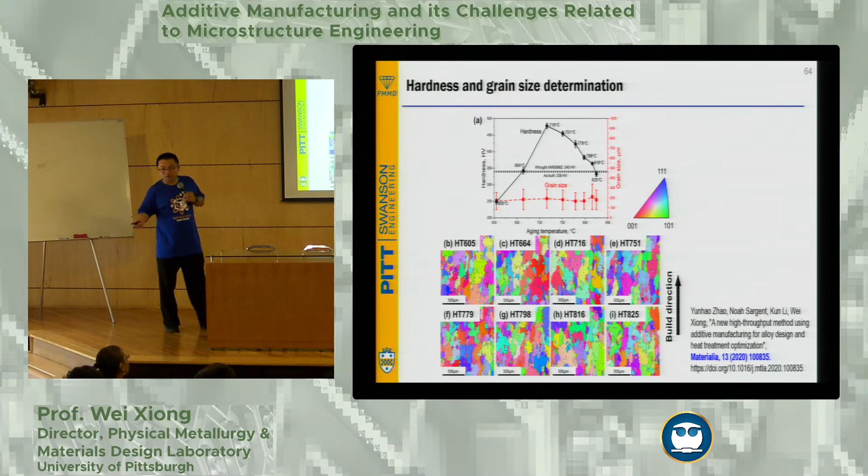Lastly, I would like to say there are some challenges in additive manufacturing - monitoring the temperature history and so on. Cooling and heating effects are very high, and you have to better control all of this. The models and databases are critical, still very important. Additive manufacturing can help us generate some useful data, and importantly, we need collaboration between mechanical engineering, manufacturing, and materials.

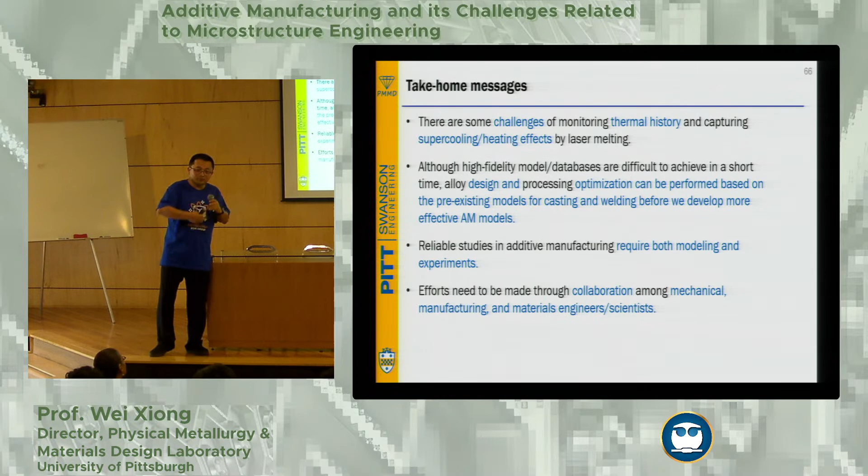Like what I said, residual stress usually is very bad, but we can utilize it to do the recrystallization process. But then, how to make a prediction of residual stress? You talk with a metallurgist, the answer is I don't know. You talk with mechanical engineering, yes, I know, some of them can predict some cracking initiation. But if you're talking about grain level residual stress, no one knows, I think. That part is still blank.

I think there are some open questions and opportunities for additive manufacturing. Level 1 is, what is the current picture of this? Level 2 is how we can couple experiment and simulation to effectively design this process and understand the relationship. Level 3 will be how we can couple these modeling efforts to make more effective design, particularly for location sensitivity, because if you print, the volume effects and location all impact the process and structure-property relationship.

Level 4 is how can you accurately provide feedback to control the processing, because you have to monitor, you have to measure, and then you can control the 3D printing process. Level 5 is creating a digital twin. I think without these levels, digital twin probably is just a buzzword - we have to understand better in order to couple the digital twin.

A certain fundamental level is, can we perform a reasonable simulation? Reasonable, not accurate - reasonable is good. Sometimes accuracy is very hard to reach, but at least you can show the correct physical picture of this process. So, can we integrate grain structure and phase stability?

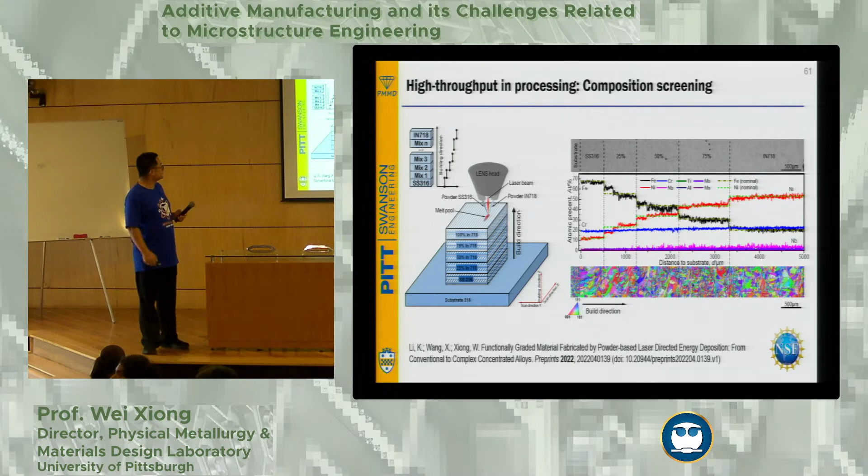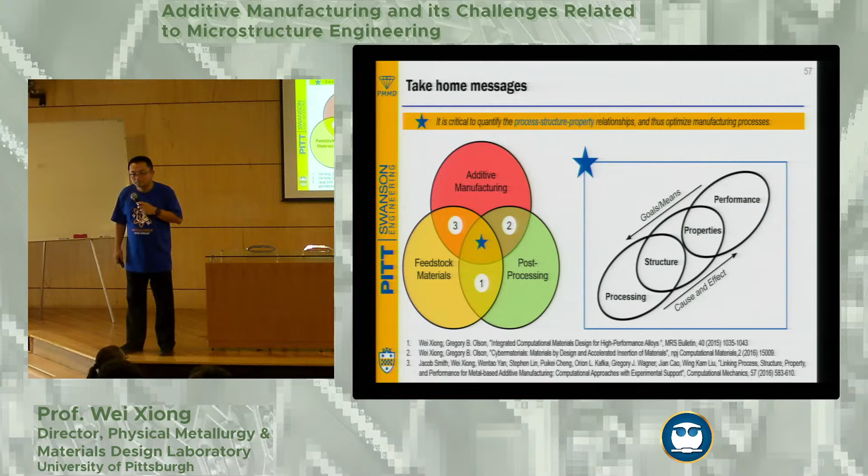You were talking about the shape of the pores and their size changing depending on the temperature. How do you explain this? Which is the mechanism? I really don't understand how the pore can change — you said the pores evolve from circles to squares and so on. But how can they do that? Which is the mechanism? Oh, that's a good question, thank you.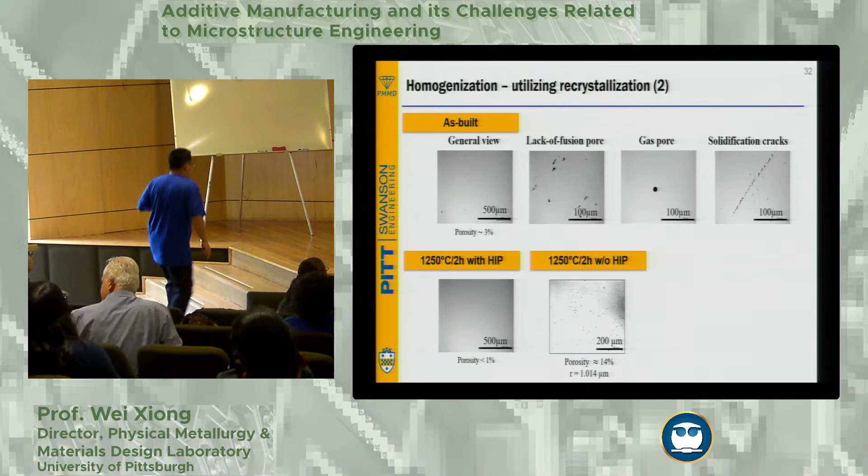If you look at these pores, usually in additive manufacturing, for the irregular shaped pores we can see the lack of fusion. If you zoom in, in a laser powder bed fusion process based on powder, sometimes you can really see some unmelted powder. Then there's the gas pore, which probably comes from evaporation of some materials, or maybe some of the shielding gas trapped inside the pores. And then there's the big crack. But very interesting — if we have to form a pore and can only make one choice, I would prefer to be a little closer to the regime of forming the gas pore.

Okay, a little bit of over melting. If you cannot have a perfect melt, I would like to introduce a little bit of over melt rather than lack of melting. The reason is because if you have this lack of fusion pores, no matter if you do HIPing or what, during the aging process, post-heat treatment, these pores will start to appear again, because you have this very small submicron features still there, and then they can grow.

But with these gas pores and spherical shaped pores, after the HIPing process, it's a little bit better, so they will not reconnect with each other. So that's kind of the idea.

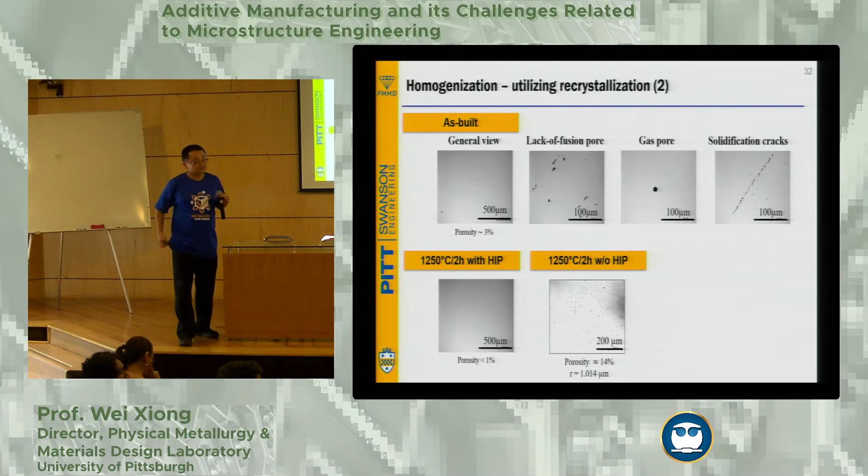We are working there. The problem is that we don't work with the powder. We don't have the technology to change that powder, but we have the technology to change the parameters. So that's why my question was this way: if we can change the parameters, then we can optimize. But I think it's the opposite of what you do, that you design the material and it doesn't matter which process parameter it is.

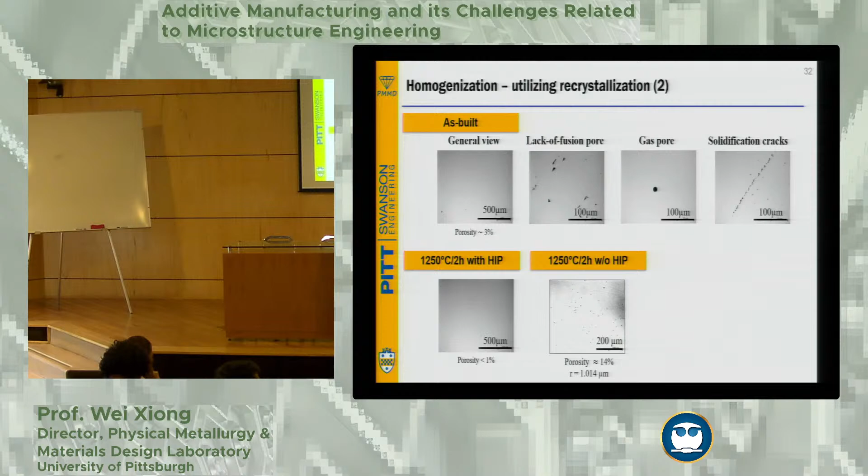You're invited, we are at UNAM ICAT, if you want to work. Probably I will be in contact with Liliana. Thank you so much, that would be nice.

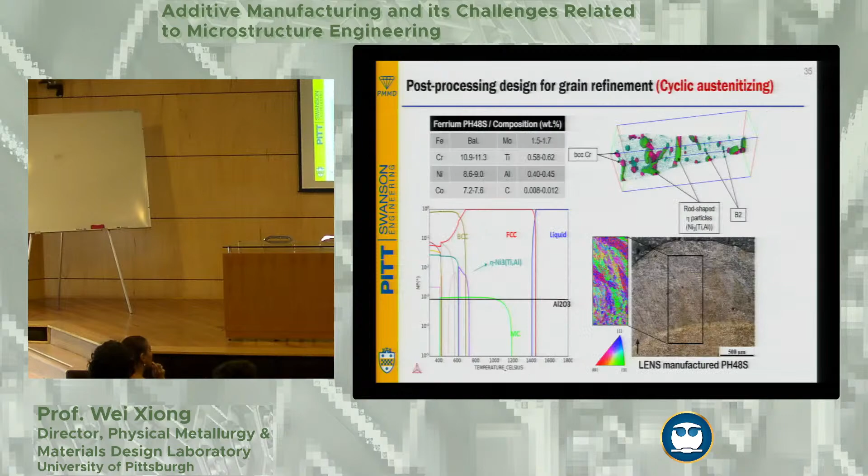Thank you, Professor, excellent presentation. Congratulations, I have a question. You presented an equilibrium phase diagram to try to explain the presence of some particles.

But I remember when I was doing some simulations to predict the presence of intermetallics in castings, in aluminum castings, I didn't use equilibrium simulations, I used out of equilibrium simulations. So just curiosity, do you think it's correct to do it this way?

This one is actually observed under high temperature isothermal heat treatment. We did a 12 hour heat treatment at a fixed temperature, so this is isothermal. This one happened at 1200 degrees C, with 2 hours and so on.

By the way, I couldn't be here yesterday to take the course on CALPHAD. I used ThermoCalc when I was doing my PhD, so can you tell us the differences, the advantages and disadvantages of both commercial packages?

Sure. I think both companies have high quality software and databases, but they have some different focuses. For ThermoCalc, they may have focuses on some particular alloys which you really have to evaluate once you're talking with them, and they have a lot of data bank information posted online. So what I typically recommend is, if you are rich enough, you can buy both companies' software and database. Ideally, yes.

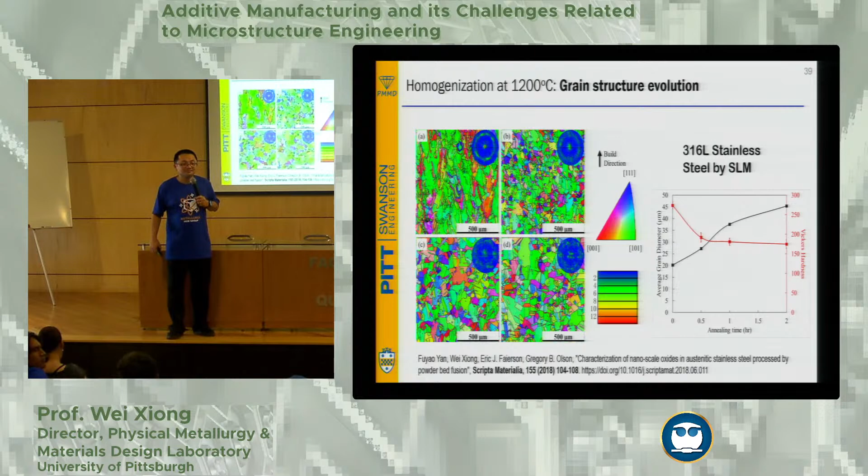I ask you, if you don't mind, a question more referring to the social aspect. May I? It's okay? Social aspects. Oh yeah, it's fine, yeah.

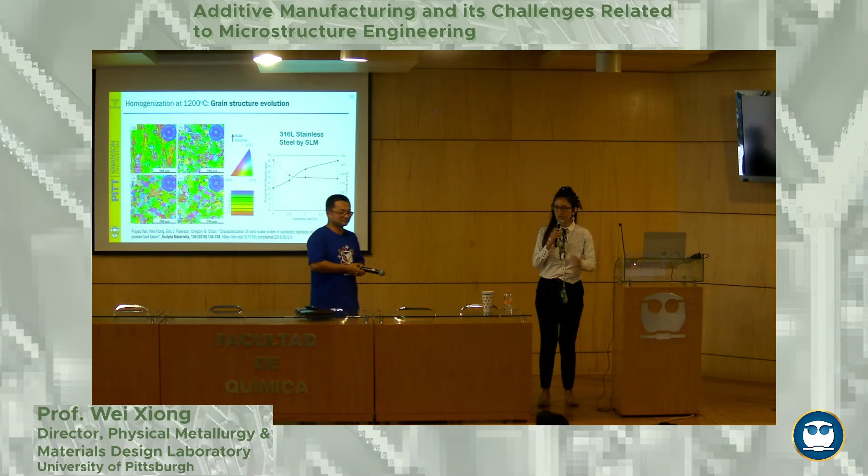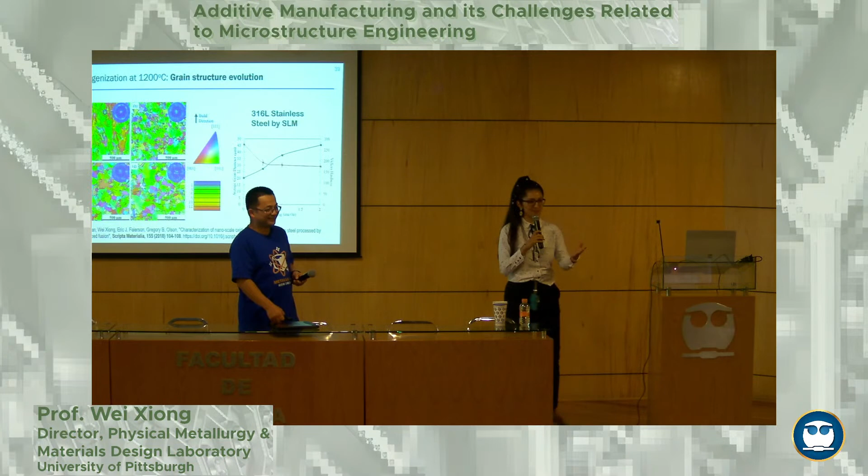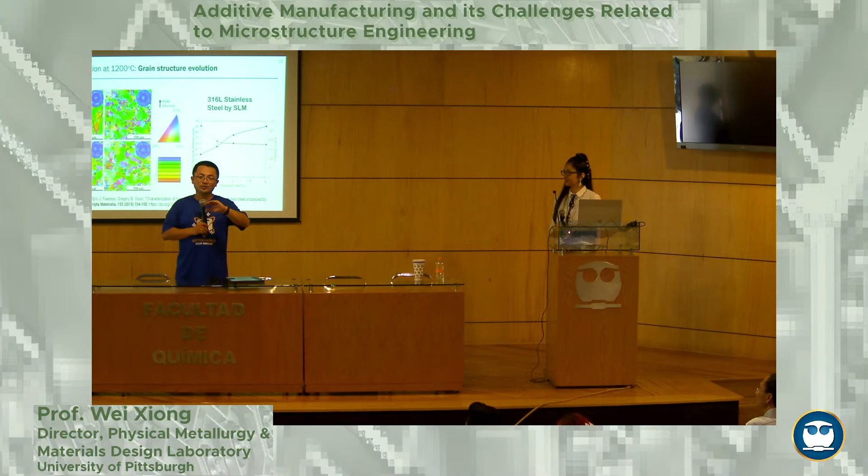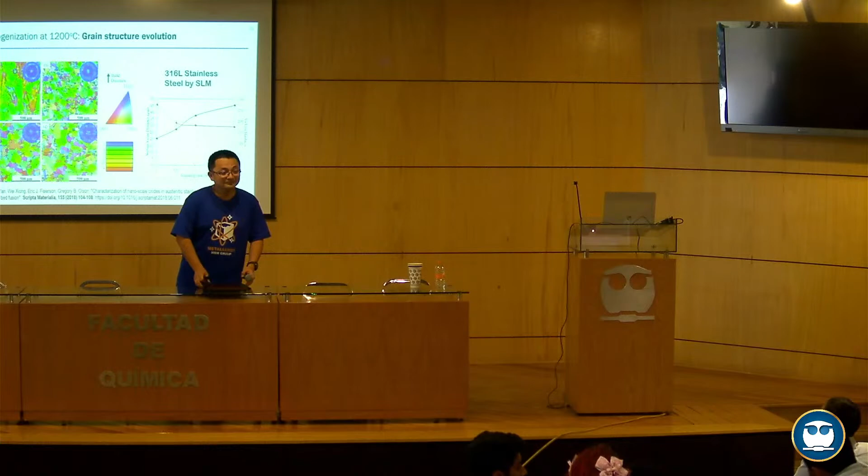Well, together with the material, the process, and the geometry, additive manufacturing has many advantages. It is able to build complex shapes. So in the future, I think it will be focused also on the material, but also in the combination of lightweight structures such as lattice structures and topological structures. These kinds of structures in combination with the material are going to enable lightweight structures and applications in aerospace, in medicine with implants like titanium implants, and even in defense. I think that's going to be the future, with some applications like multifunctional 3D printing as well. I think that's it.